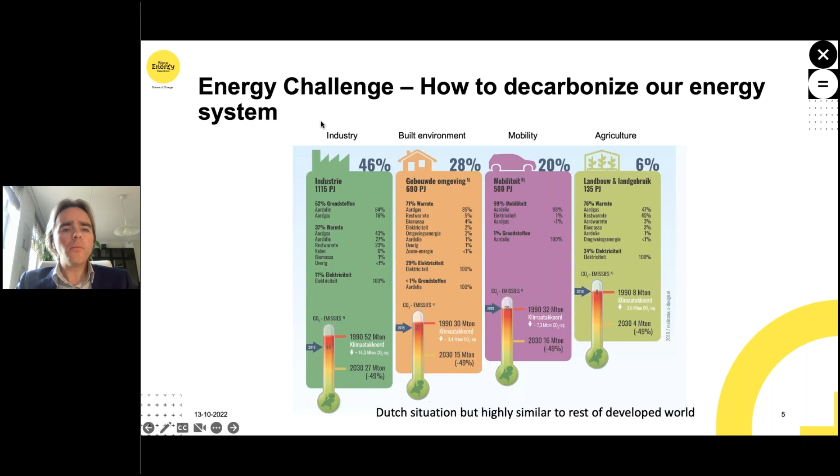The thing is that energy is not something that we finally need to use. And I think that's really important to take note of, because it's just a carrier. What we want as a society are somewhat of a service or something that needs to be done. For example, we don't want electricity, we want, in this case, clean clothes. And we can use different carriers to satisfy this need. So currently, if you wash your clothes, you can use electricity, that's just putting stuff in the washing machine. But you can go for other approaches, like using hydrogen in a fuel cell directly.

Another aspect is you can travel from A to B. Currently, that's being done using gasoline if you go by car, or jet fuel if you go by plane. But you can also use different carriers there. Same goes for a comfortable house, but also products like plastic cups. Currently, plastic cups are made using crude oil, but we can go to other aspects for power-to-product, so for example using hydrogen as an intermediary, or we can go for plant-based materials.

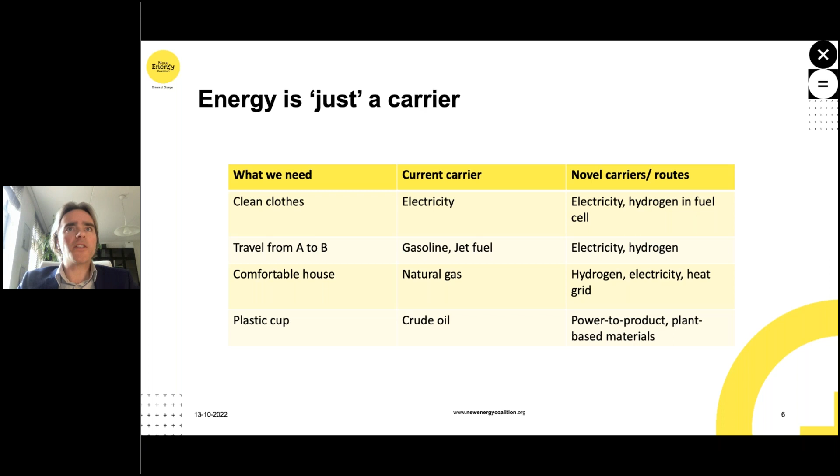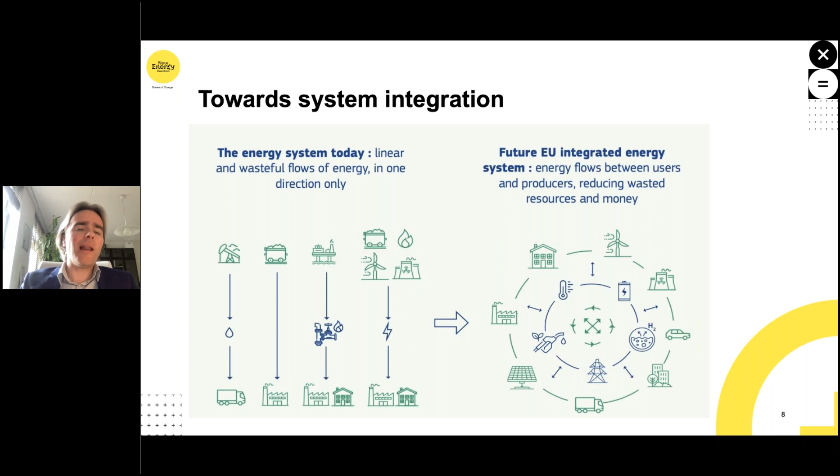The thing is that what we used to do is we had a one-way energy system, which was also going back to this trilemma, was affordable and secure, but not really sustainable. And now we're going to a more sustainable energy system, this integrated energy system, which is at least sustainable, but might lack in security or might lack in the third one, affordability. It can become super expensive.

So the thing is, we also have some challenges here, because if we're going for system integration, we have three so-called mismatches. The first one is the mismatch in time, and this is mainly the case with renewable sources. That is, if you have intermittently producing energy generators like wind or solar, it's not necessarily the case that you can also use the energy at that time.

That's the first one. A second one is that you have a mismatch in location. That's not necessarily for renewables, but it's for everything. You can produce something at location A, and it needs to be used at location B, which might lead to congestion on energy systems. And the final one is mismatch in function.

That is, you produce, for example, electricity or green gas, etc., but you need something else, like a heated house or a plastic cup, etc. Energy system integration is all about creating solutions for these three challenges, and all three need to be met. Otherwise, we won't result in an integrated energy system that is cheap, reliable, and green, like mentioned in the energy trilemma.

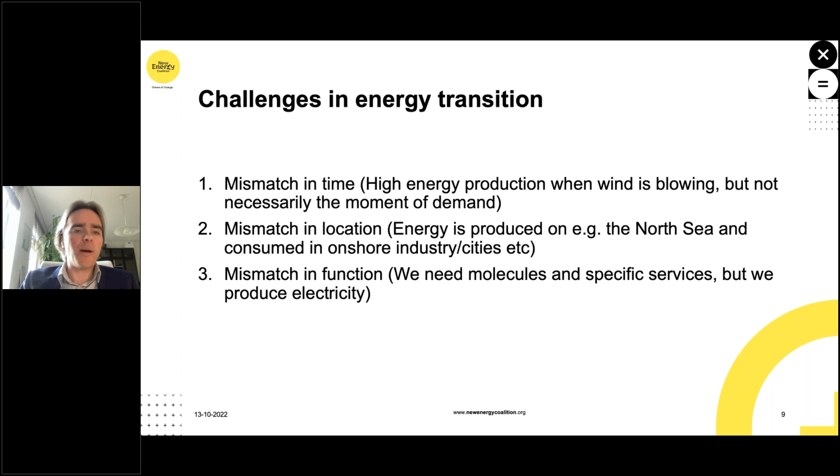Different stakeholders have come up with different approaches to system integration. The first one is the EU. The EU is counting for 4 pillars as the pillars for energy system integration. It needs to be efficient and circular. We need to decarbonize our power system. We need to decarbonize our fuel system, and we need to create an energy market.

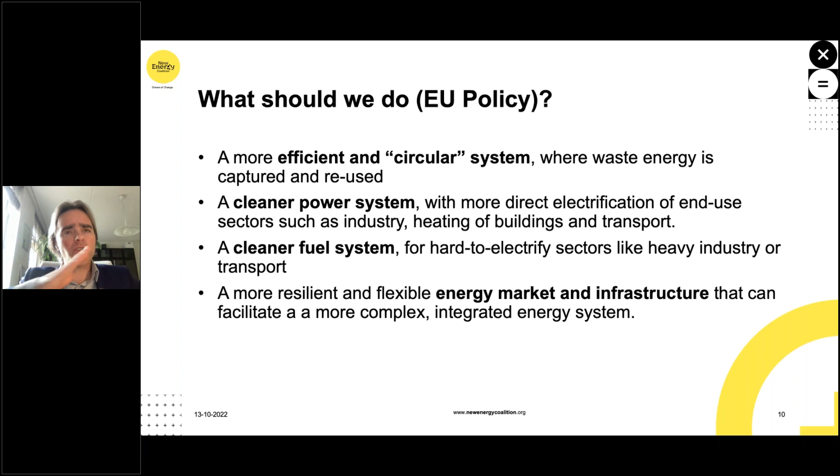This is highly in line with what I previously mentioned, that it needs to be affordable and you need to decarbonize the sectors, but it's just another cross section. As New Energy Coalition, we also have our... oh, sorry, I missed this one.

Using system integration, we can solve many of the mismatches. Possible solutions are, for example, for a mismatch in time, that we can come up with storage, or demand response, so using your washing machine when the wind is blowing. But we can also go for cable pooling, so that means you put both solar and wind on the same export cable. Since solar and wind are not really producing at the same time, you solve your mismatch in time because they are really complementary.

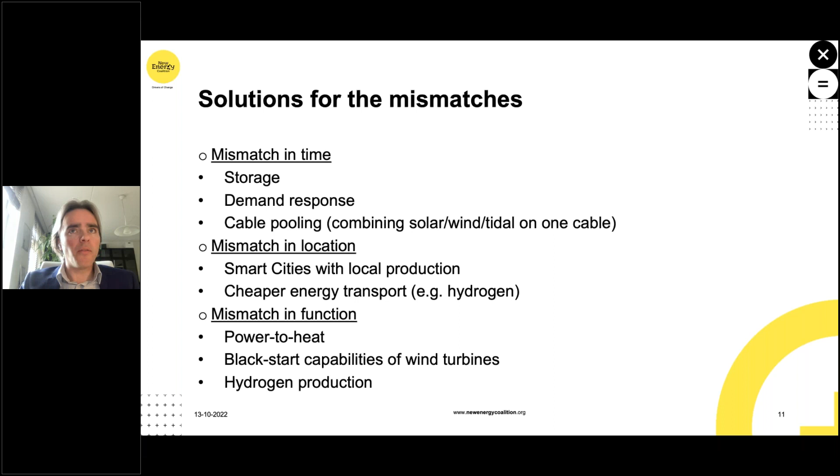For mismatch in location, we can come up with solutions a little bit later. You can come up with, for example, a smart city where you produce your energy as close to the consumption as possible. You can go for new approaches that will create a lower price for transport, so then location won't be that much of a problem anymore. And for mismatch in function, you can come up with all sorts of conversions or new approaches, also new integrated solutions that will allow you to create other functions as well.

That was a sheet I was looking for. As New Energy Coalition, we're also looking at system integration in a way which is similar to the European Commission, but since we want to generate projects out of it, we have created this canvas with 3 different levels where system integration can play a role: on a local level, a regional level, and an international level.

Today, we will discuss the international level and the local level. And we have 4 different aspects that need to be challenged on all of these levels. The end result, as shown to the right, is a decarbonized industry, mobility, built environment, and agriculture. The pillars: organization. The first one is how can we organize a system that will work, that will not be too expensive, where everyone will do the right things.

A second one is about control. How can we create a system that is inherently safe and cheap, and that is also balancing supply and demand? A third one is access. How can we create an energy system that is accessible to everyone at affordable prices? And a final one is how can we go for new developments? I would say that's somewhat of an umbrella term, because we need somewhat of a technical development in order to make things work.

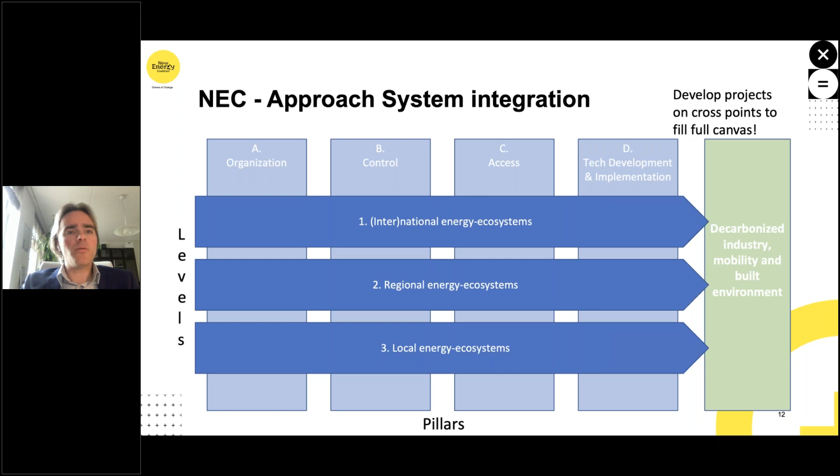As New Energy Coalition, we want to develop projects on all of these cross points between the horizontal and the vertical approaches, because that will allow us to slowly progress into system integration. A little bit of discussion over here.

A second one is about regional system integration, so that could be energy islands, energy ecosystems. That is somewhat of a plot, a little bit bigger in scale than a really local energy system, where you have all sorts of energy streams, waste streams, heat, etc., that can create an energy island. That doesn't have to be an island per se, but an energy island is a system where all streams are balanced and where there's no interaction with the outside world.

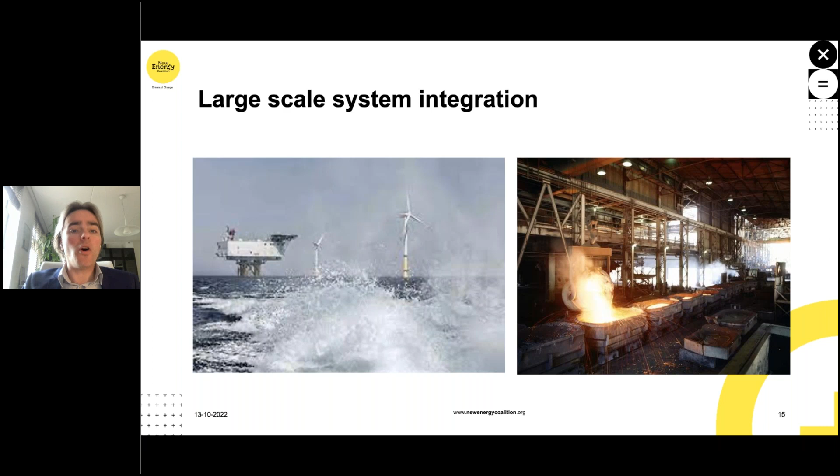As mentioned before, as New Energy Coalition, we've got many projects on all different aspects. I've shown some of them. This is just part of our portfolio. You can see our full portfolio at newenergycoalition.org.

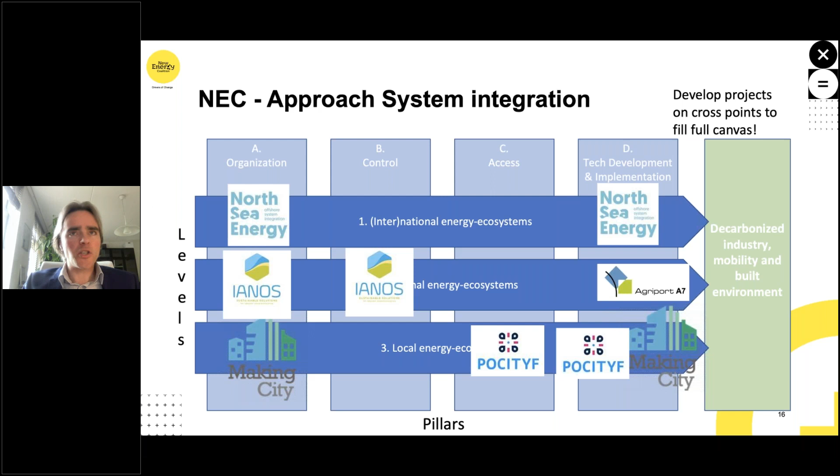For example, on international energy ecosystems, we have our North Sea Energy Program, which tackles all of these aspects, but aspect A and D a little bit more. On this mid-level, we have projects like Agriport A7, IANOS, etc. And on this small scale, the one Martijn will be discussing, we have smart city projects like POCITYF and Making City.

Well, this was a little bit of an introduction, a really short introduction on energy system integration. I'd like to continue with offshore system integration. Note that I left out energy system integration, because especially offshore system integration is more than just energy. It's about integrating a system, an offshore energy system, an offshore fishery system, sand extraction, etc., into one system, in this case, the North Sea.

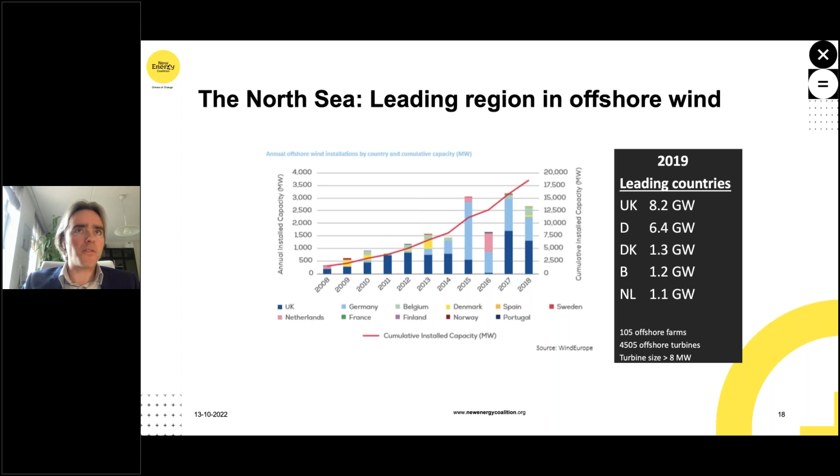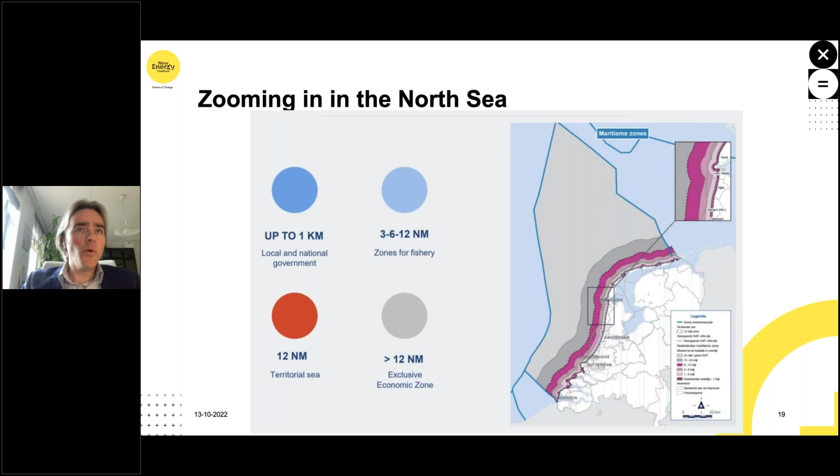That really depends. If you are really close to shore, it's actually owned by the local government. The further you go away from shore, the more the ownership is transferred to a higher body. And that will create many challenges, mainly challenges with who has the first right of doing stuff.

I would like to stress three of them. The first one is nature, because by law, and also by doing things that are okay, we need to take nature as a starting point, since many large parts of the North Sea are important nature areas, but some of them are also Natura 2000 areas, which are really valuable in the sense that they have a high amount of habitat for big amounts of species, and are also mainly fragile.

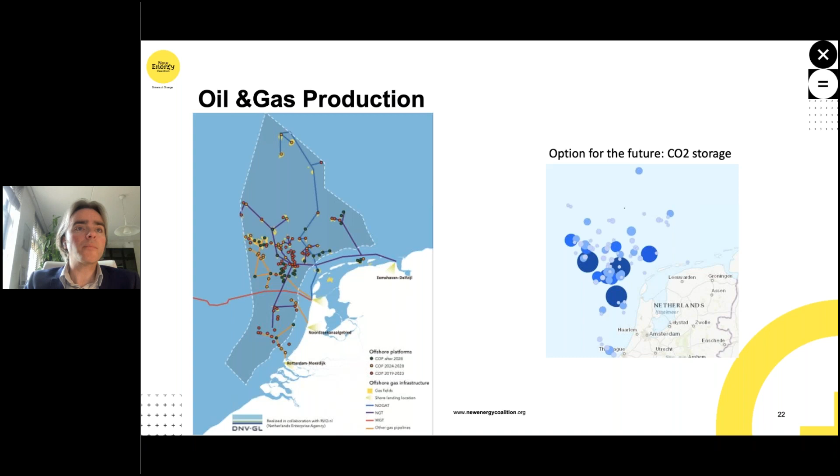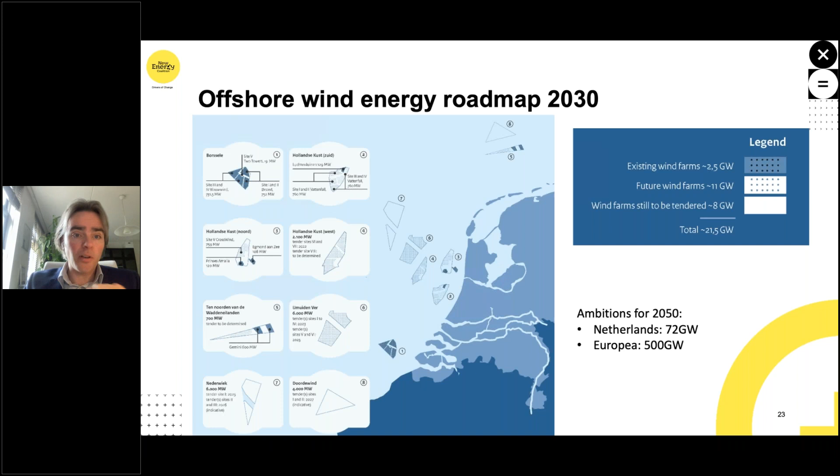But do take notice that, for example, the reason that all the area between sites 1, 2, 3, 4, and 6, etc., have no offshore wind farms planned, is that there's no space whatsoever. So even though this does look like there's a lot of space, it's not the case. We really need to squeeze stuff in order to achieve this 72 gigawatts. These 72 gigawatts are definitely possible, but they need to come with some sacrifices on other fields.

Offshore energy production has a lot of challenges, also in line with the ones previously discussed on these mismatches. So a first one is mismatch in time. What we're doing, especially if we're creating large amounts of offshore wind, is that you have a really large peak production that might be, especially if we're going to 70 gigawatts, up to 10 times higher than our average power consumption. So that will be a huge mismatch. On the other hand, if there's no wind blowing at the North Sea, you have a similar problem, but the other way around.

There's also a mismatch in location. Many of these offshore wind production locations are far offshore, which leads to a very expensive infrastructure. And since the wind is not always blowing, this infrastructure is underutilized. A second one is, how can we service these kinds of wind farms, which sometimes serve in really challenging conditions, also during winter, etc. So servicing might become an issue.

A third one is that we have a mismatch in function. Since if we're putting a lot of eggs into one basket, so that's the basket offshore, if we have a problem offshore, we won't have the stable energy system anymore. So that's one thing in function. So we don't have a functioning energy system anymore.

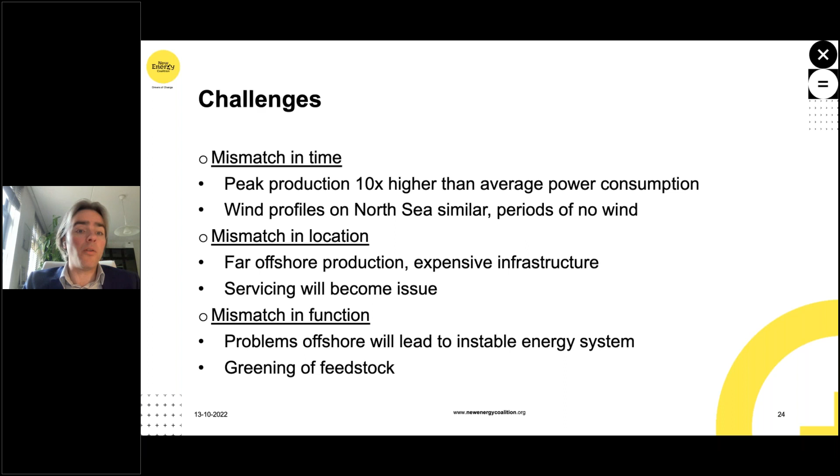And the second one is, if we produce lots and lots of electricity, we might only decarbonize parts of our consumers. For example, industry, especially the part of the industry that's going to create products, cannot be fed using electricity alone, at least not given the current approach.

A solution here can be a conversion into hydrogen. And well, a lot has been said about it, but all of them have advantages and disadvantages. For example, you could try and make hydrogen inside a turbine. Good thing is that it's relatively easy to convert, because you can do some optimizations inside the turbine. You can even make the system much more simple.

But distributed production, especially in an offshore location, might become challenging and expensive. And how will you come up with the ultra pure water that also needs to be distributed to create this meshed infrastructure? You could also go for cluster turbines, which is somewhat of an intermediate.

It's easier to come up with, but does not have some of the advantages that inside a turbine might have. You might go for a platform, similar to how electricity is currently combined onto one substation. You could go for a substation that directly produces hydrogen. That could also be an island. With the disadvantage that you need additional infrastructure, additional investment, and you still need part of the electricity infrastructure.

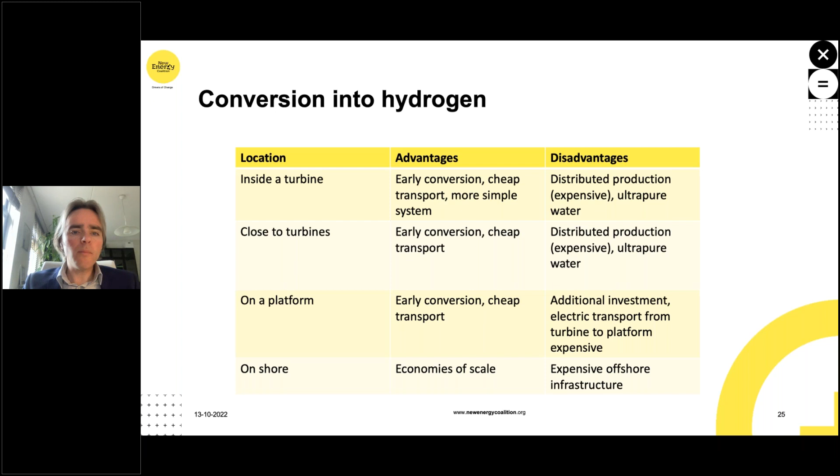A solution that's highly related to this, also related to the solution of hydrogen, but also these faraway wind farms, is the development of energy islands, which can solve some of the challenges. So, for example, the fact that since you're so far away from shore, it's really hard to service, and it will be really expensive to bring the energy onshore, and also might be a solution to your hydrogen solution. However, most of these will have a lot of challenges, because who owns this structure? There might actually be challenges in smuggling, etc., especially given Brexit.

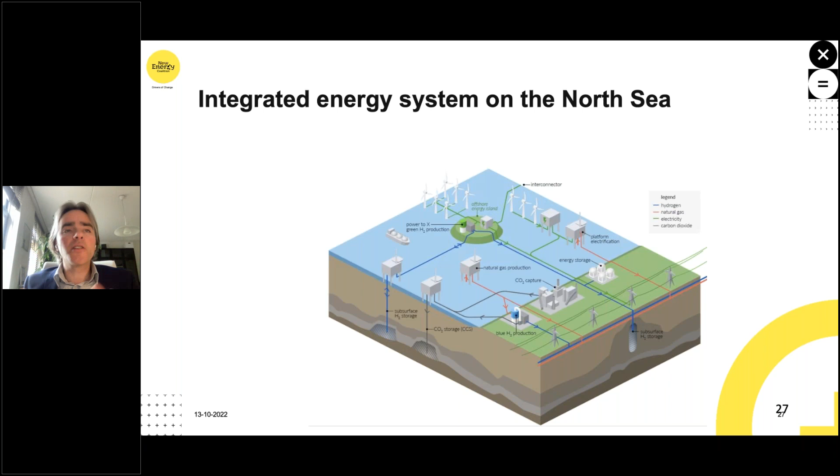This is easier said than done. Overall, we're aiming for an integrated energy system in the North Sea that might look like this. The thing is, we don't know exactly what it will look like. We know the building blocks and the general direction: more wind offshore, more conversion into molecules, more integration between oil and gas and wind. But the end location is not sure yet. So here I've shown an option for system integration, but we don't know the sizes. Currently they're just mentioned, but we don't know if power to gas will become bigger, or if we will go for existing gas infrastructure. So as long as we're not there, we should aim for betting on all of them, because we cannot afford to lose an important solution.

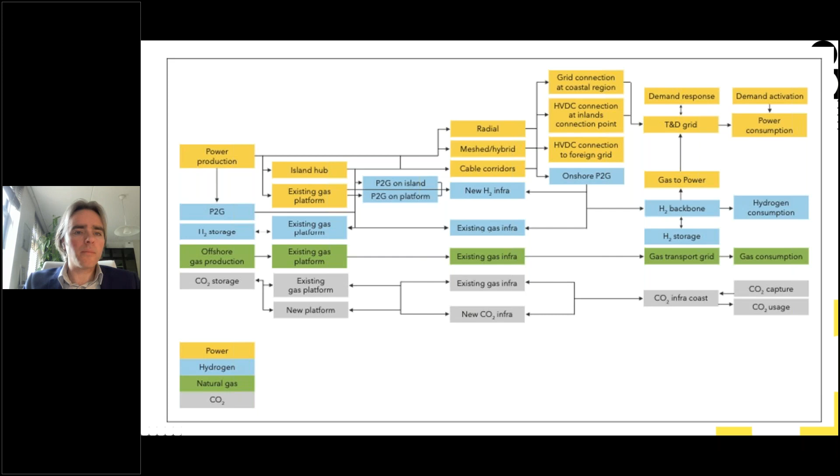So then I'll come to what is needed. First, we need research and development, we need to get our facts straight, as I discussed previously. We need a bit of international coordination because as the Netherlands, we're not in this alone - the North Sea is one location and international coordination can be really important. Third, we need to invest in infrastructure, because infrastructure is a prerequisite for new developments. If the infrastructure is there, the risk for developers who want to develop a solution from TRL 1 to 9 or 10 is lower, meaning people are more inclined to embark on a challenge. Finally, we need regulation also to de-risk. So it's all about getting a better overview using research, and de-risking all of the activities on the North Sea, because lower risk means people are more inclined.

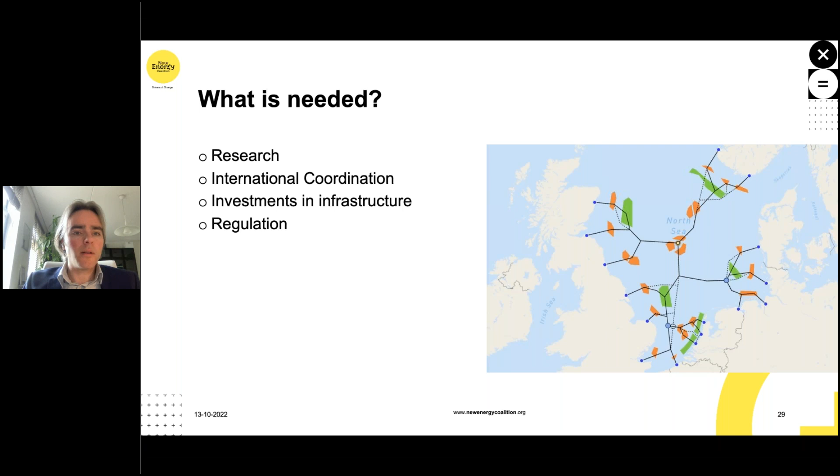As mentioned before, a bit about one of our big projects that wants to have at least some influence on this whole solution - it's the North Sea Energy Project. It's a research program on energy system integration on the North Sea, with a goal to create a clear pathway for system integration, and find answers to the challenges mentioned before, with focus points on energy hubs, ecology, logistics, a roadmap, etc. It's actually kind of well laid out and tackles most of the aspects I've come up with during my presentation. Hopefully this will be a starting point for actual developments, investments, regulations, etc. But that's all still pending, and a lot of stuff needs to be done, both from a Dutch or country perspective, but also from a European perspective. I think we're well underway, and I would say to be continued. This is definitely a really challenging topic on the larger scale system integration.

For the second part of our presentation, I'd like to give the floor to colleague Martijn, who will provide us with a similar story, also looking at challenges and possible solutions for small-scale energy system integration. I'd like to give the floor to Martijn.

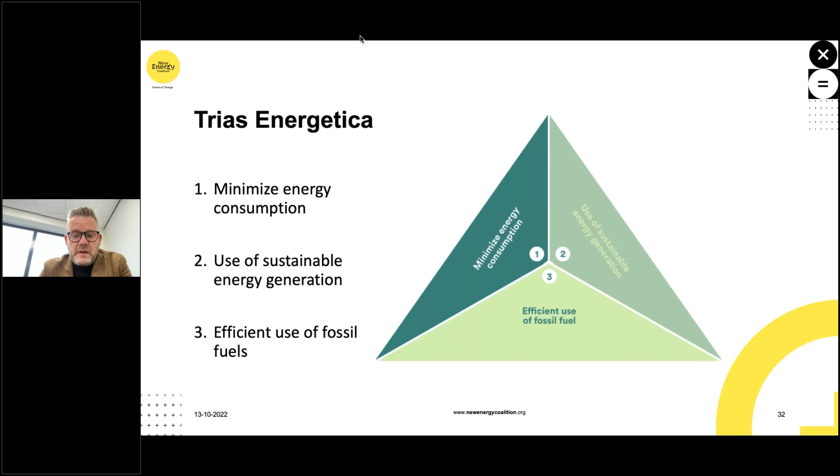You might question, how does this trias energetica relate to system integration on a local scale? Well, in order to give substance to the trias energetica and the energy transition on a local scale, Europe has focused on, among other things, the realization of the so-called PEDs, the positive energy districts. When realizing these PEDs, and I'll come to that later, the issues of system integration emerge very clearly, and that's why I want to use the PED, the positive energy district, as a guideline in my presentation on system integration on a local scale. Can I see the next slide, please?

Well, first of all, I think it's good to consider what PEDs exactly are. PEDs are, in the first place, energy efficient and energy flexible urban areas, groups of connected buildings. Second, they produce net zero greenhouse gas emissions, and they actively manage an annual local or regional surplus production of renewable energy. So to summarize it, in the end, on a local scale, it leads to a surplus of energy that is produced on a local scale.

They also require something in order to be called a PED. It requires the integration of different systems and infrastructures. It also requires the interaction between buildings and the users and the regional energy, mobility and ICT systems involved. And last but not least, it requires securing the energy supply and a good life for all in line with social, economic, and environmental sustainability.

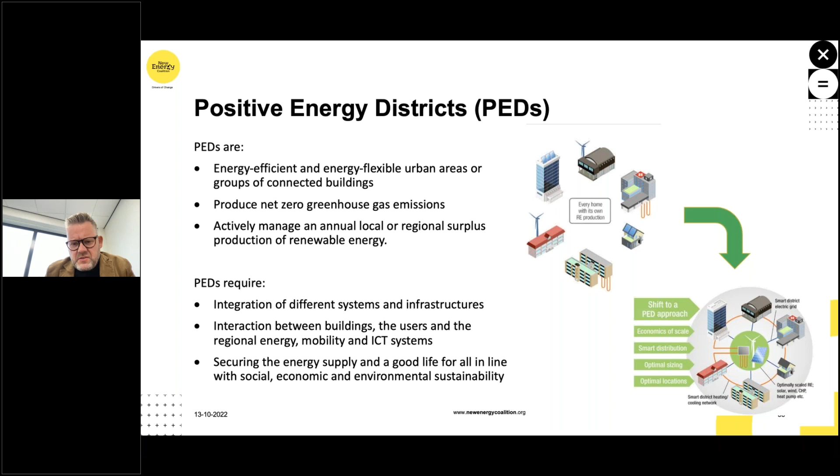And as you can see in the picture, it may be a bit small, but I'll try to explain it. What you see on the picture on the top right, it says the idea is not that every home needs to have its own renewable energy production asset. Instead, what would be an ideal situation, optimal situation, would be a shift to a positive energy district approach, meaning...

...that options should be available and choices should be made in terms of where to put these renewable energy production installations in the best possible way on a local scale. That would lead then to economies of scale, would also lead to smart distribution, optimal sizing, and optimal locations.

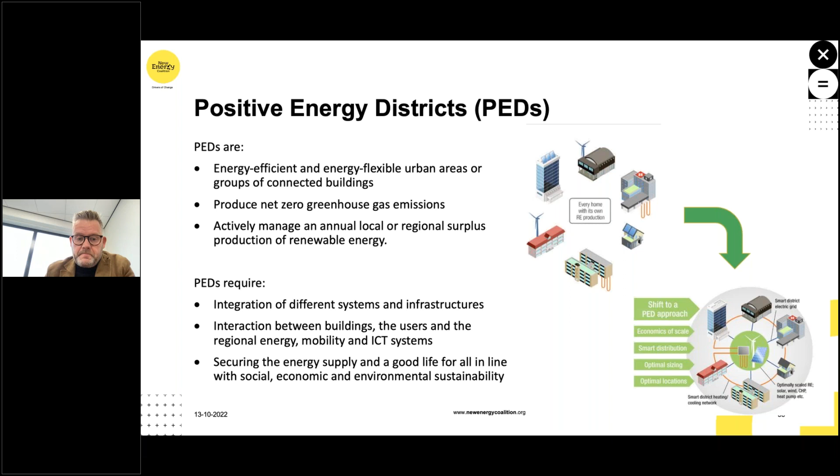When realizing PEDs, several challenges arise that make the objectives of the trias energetica challenging in practice, and which are also typical system integration issues. I would like to mention two of them: the mismatch between energy production and energy consumption on a local scale, and the awareness that is required by people regarding energy use.

Let me start by explaining shortly about the mismatch between local energy production and consumption. This one has been shortly touched upon by Mark already, but I'd like to bring a bit of focus on the local aspect of it. Given the fact that at district level you want to produce more energy than you will consume, one of the...

...first logical questions, I think, is what to do with the surplus of energy that you generate. Well, in most cases, this concerns electrical energy simply because we can produce it in a relatively easy way on a local scale. And particularly nowadays, by using solar energy and wind energy.

This surplus of energy can actually be used in two different ways. You can either feed it into the grid, or you can temporarily store it in a battery. Whereas the first option, to feed it in the grid, is the most commonly used method, which is still interesting, particularly in the Netherlands, since we here have the possibility of what we call netting. However, that also leads to issues in terms of available capacity on the grid.

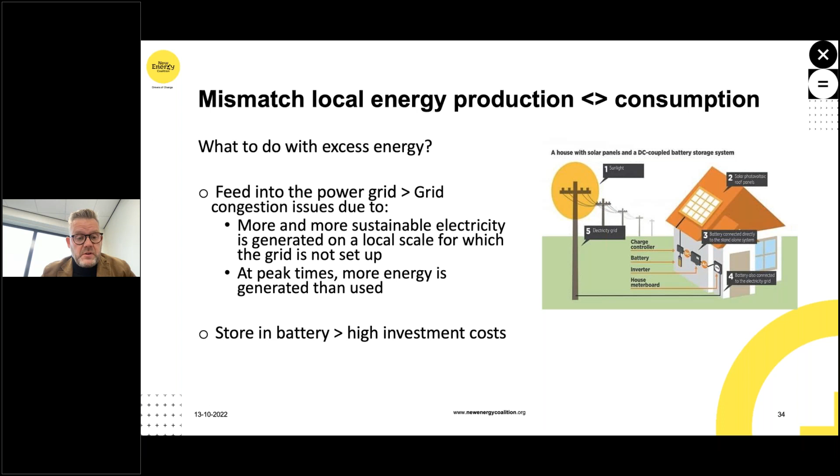As an alternative, there is the option to store the excess electricity in batteries. However, we also see that this entails high investment costs. And for the moment, it's still an issue for people and organizations responsible for solving the issue of grid capacity to invest and bear the investment costs in batteries. So yeah, that's one of the main issues when it comes to setting up a PED, specifically the mismatch that arises.

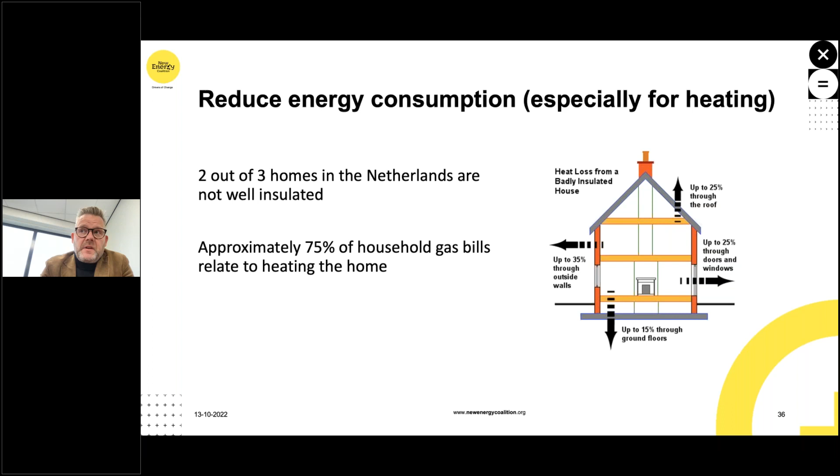So again, these are just two challenges that need to be overcome when it comes to the development of positive energy districts, for which I would like to go to a specific project that we as New Energy Coalition are working on, where system integration also plays an important role.

That project is called POCITYF, and it deals with the development of positive energy buildings and districts, next to other aspects such as e-mobility integration into the smart grid, energy storage and management, but also citizen engagement. So the softer aspects of energy transition, which play a very important role in setting up positive energy districts.

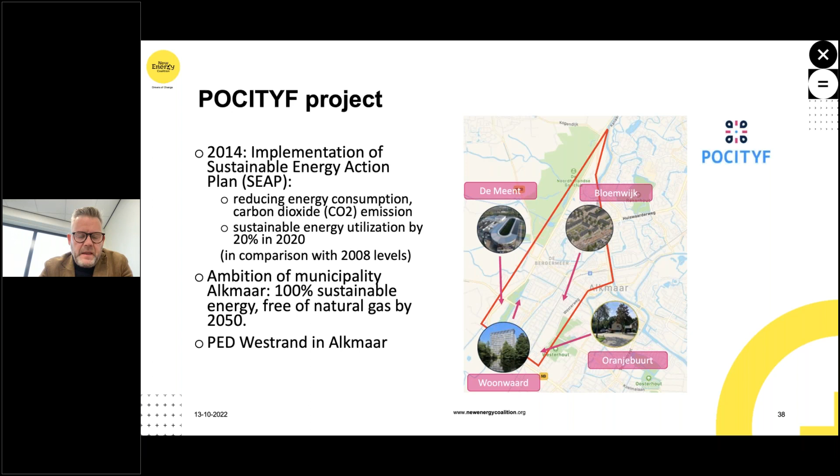The POCITYF project was, well, I wouldn't call it a kickoff, but it was and is an important project to make those ambitions more concrete. I'd like to focus now specifically on the Positive Energy District part, because that plays an important role in the whole POCITYF project and meeting the objectives set by the municipality.

I would like to name two specific sub-projects within POCITYF where we work concretely with partners, just to illustrate what realizing a PED means in practice. Unfortunately we don't have time to go in depth, but I think this introduction gives a good picture of how we work in Alkmaar in concrete terms on realizing the PED with the associated issues.

So the first sub-project is called Sports Complex De Meent, located in the Westrand area, named after the district. The Sports Complex De Meent includes indoor sports, an indoor ice rink, and an outdoor long track ice rink. For this specific complex, the municipality has expressed the ambition to make the building more sustainable, in other words, to make it completely fossil-free in terms of energy production and usage.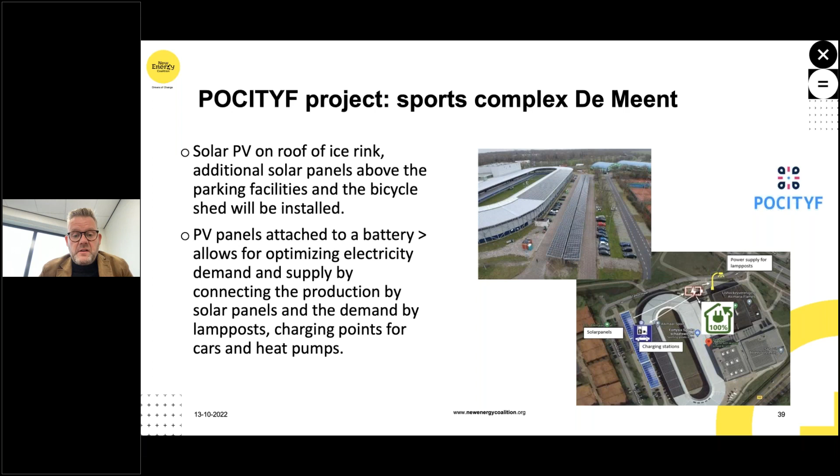These PV panels are then attached to a battery, and that battery allows for optimizing electricity demand and supply by connecting the production of these panels to, for instance, the lamppost, but also to some charging points on the parking lot, and heat pumps. Those are just some means where the electricity is used, but in general terms, the electricity produced is mainly used to power all the assets that need power on the location.

Next to that, there's also an investment, a sub-project focusing on the establishment of low temperature waste heat on the location, making use of the ice machines. For the icing rinks, these machines, although they produce cold, at the same time also produce heat. And this heat, up till about a year ago, was not used in a good manner - it was just blown away. Now, by doing some smart investments, this heat also serves as a source for the heat pumps, as I mentioned before.

Next to that, that heat also balances the temperature fluctuations of a so-called aquifer system that's part of the POCITYF project in Alkmaar. So an aquifer system is a system placed in the ground to store heat and cold, and to interact with fluid streams in the bottom, using that temperature and exchanging temperature differences in order to either heat or cool the location.

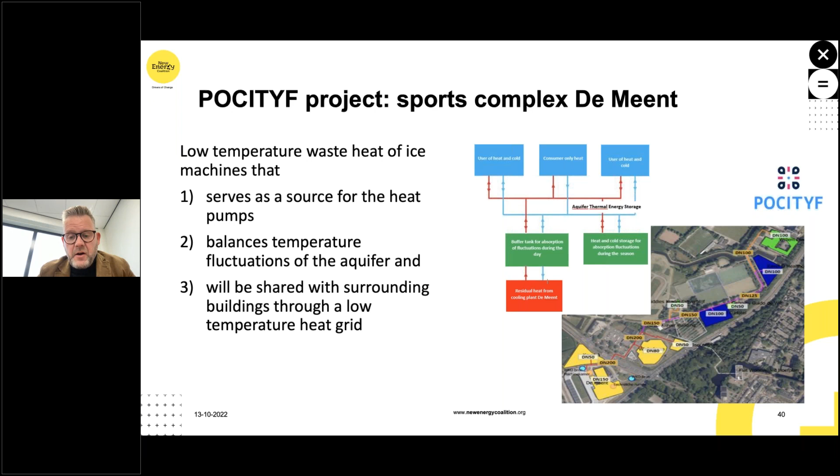And the picture shown on the bottom right indicates an initial plan of the distribution of the heat, not only for the sports complex itself, which is indicated mainly in yellow, but also, if possible - and that's dependent on the available capacity - to distribute that heat to other locations close to the sports complex. So I think this is a very good illustration of how these kind of networks can help make not only the specific location more sustainable, but also adjacent locations.

Then another sub-project in the POCITYF project is the Woonwaard high-rise. The high-rise is a 10-story building, also in the Westrand area. As you can see in the picture, that's an artist impression - on top of that building, a huge PV installation will be constructed and commissioned presumably by the end of this year or the start of next year. Next to that, the southern facade of the building will also have PV panels installed.

In the end, the electricity produced on an annual scale will be approximately 250,000 kilowatt hours, which will be sufficient for the power demand of the whole building block. But as you can imagine, particularly during sunny days in summertime, the demand for electricity will not balance the production. In order to overcome the grid congestion issues I described earlier, a battery will also be placed to store this electricity and potentially use it at a later time.

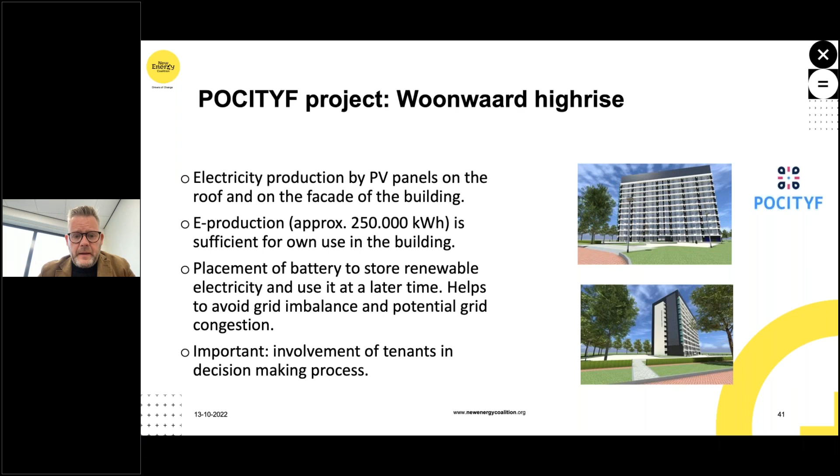Yeah, can we go to the next slide, please?

Again, as I said, people tend to look specifically at the technical aspects when it comes to realizing these positive energy districts. We see that a lot. There's a very strong focus in POCITYF as well on implementing technical and innovative elements at various locations. But a study conducted by the University of Delft showed that actually there are far more relevant aspects when it comes to realizing PEDs - in fact, there are 7. And those 7 I depicted in the slide here: governance, incentives, social and process, market, technology, and context. And as I said, technology is only one of them.

Just to illustrate - I'm not going to go into all details of these various aspects, but just to illustrate what is meant, for instance, by governance.

It's about new and innovative forms of collaborative governance. When you talk about the realization of PEDs, the development of sustainability plans together with citizens is important. That's just an example of the importance of governance.

In relation to technology, I'd like to come back to that once more: how can we apply new technology to balance offer and demand for these PEDs? So there are several factors that need to be taken into account when developing a PED.